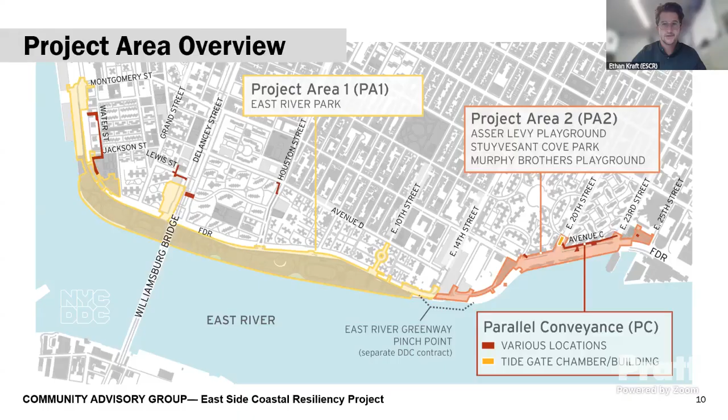A snapshot of the contracts, highlighting the major changes that have happened since our last meeting, our last virtual meeting in July. This reflects the new openings in East River Park, which include the amphitheater, the northern tennis courts, the Esplanade areas around those amenities, and then the Corlears Hook Park flagpole area and the Corlears Hook Bridge. The Pier 42 connection has also reopened, and then the 3 access points north at Houston Street are closed for construction in those areas of the park.

Up in Stuyvesant Cove Park, we are excited to see the opening of the East 23rd Street entrance with the completion of Solar One. I have some photos of that. And then Parallel Conveyance - these are the different locations that we have for that project.

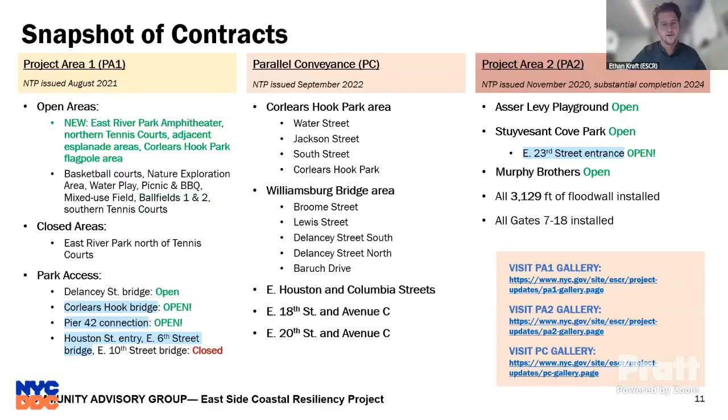In Project Area 2, the Solar One building, which was separate from ESCR, was recently completed. That allowed us to reopen the entrance at East 23rd Street, so you can now walk the full length of Stuyvesant Cove Park from the street side. We're very happy to see that open up. There are some punch list items still going on through Project Area 2, but most of the major work you would see is complete.

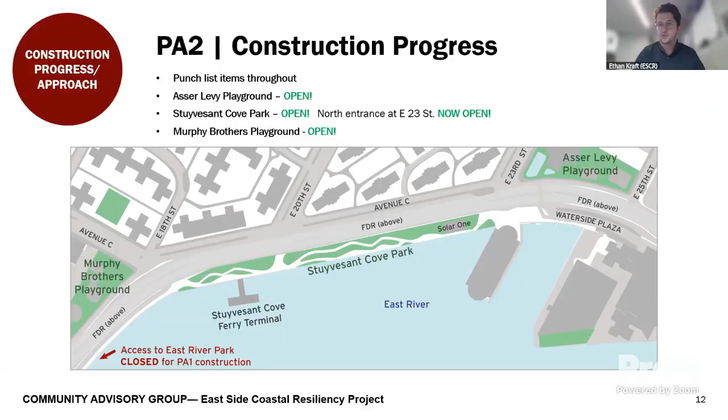Some photos of the Solar One building, which again was separate from ESCR. On the left is the building itself with the Esplanade on the right side of that photo, and then those 2 photos on the right side of your screen are the newly opened East 23rd Street entrance with a vehicle gate and bollards at the entrance to the park.

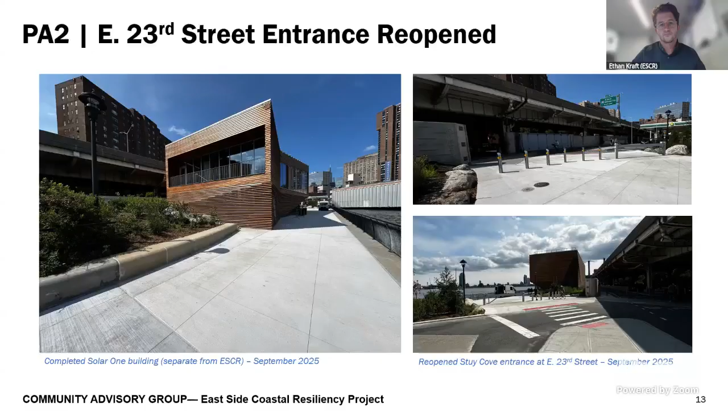Moving on to Project Area 1, we have construction activities all throughout the project. At the southernmost end, where you see the 1 on the map, we have flood wall and floodgate operations going on. The Montgomery Street parking lot is being restored, that's under the FDR. We have some photos of both of those operations in a couple of slides.

Moving further north, but remaining in the red area of this map, in that small sliver, there is a parks maintenance and operation building being constructed, as well as the tennis building. In areas 3 and 4, we have excavation, Esplanade reconstruction, more work on the East Houston Street retaining wall, and then clean fill installation for the portions of the park where construction is a little bit further along.

In the areas that have just closed, we get started on that deep sewer work, flood wall construction, and then excavation of those areas. In location 5, which is near Riis Houses, we have some night work for utilities. And then at the north end of the Riis complex, we are preparing for the flood wall construction that will cross the FDR and run along the property there at East 13th Street.

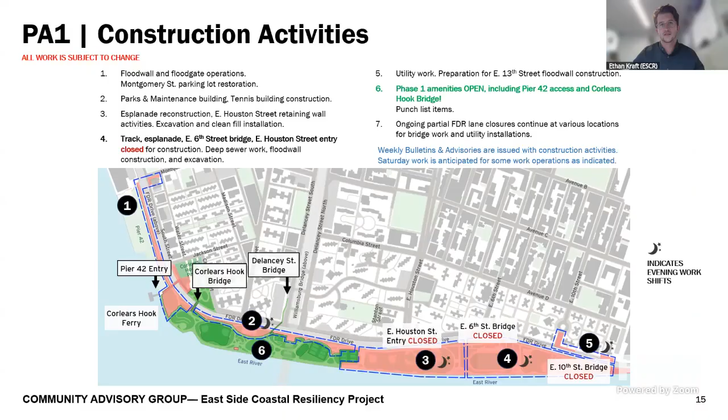Number 6 basically encompasses all of the newly opened areas, so East River Park as well as Corlears Hook Park. We have minor punch list items going on through there as that handover continues. And then along the FDR Drive, we have partial lane closures, usually at night, to accommodate bridge work or utility installations or anything that requires us to close a lane of traffic for safety.

We do have quite a bit of night work going on within the park itself. This has been going on this week, and it will keep going for another 2 or 3 weeks. There is a bit of night work up near Riis at East 10th Street, to accommodate utility work and median demolition, and that requires partial lane closures on the FDR Drive. So that's what this photo here is of.

You can see the trench that is right there at the FDR Drive service road near Riis. You're looking towards the East River and East River Park in this photo.

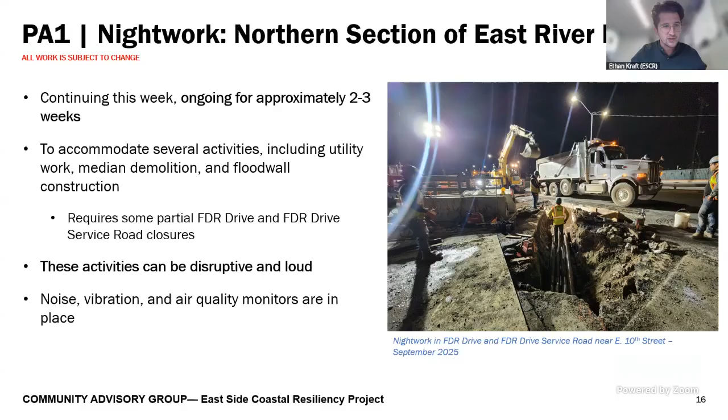These activities can be disruptive and loud. As always, if you hear something, say something. So if it's particularly disruptive, please try to take a video and contact our CCL so that we can get to the bottom of it and address it. We do not want to cause any more annoyance than we already are by working in the park at night. And then, as always, we have the noise, vibration, and air quality monitors in place around those activities.

Some construction photos. This is the deep sewer work that happens when we start work in a new area. You can see these trenches are pretty deep. On the right side is the steel formwork for some of the infrastructure that's related to the sewer.

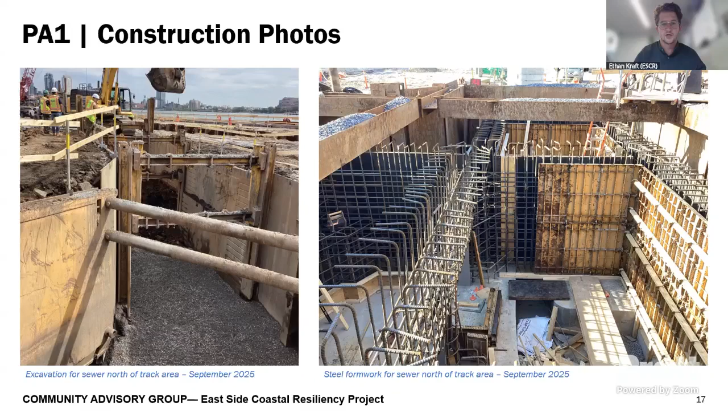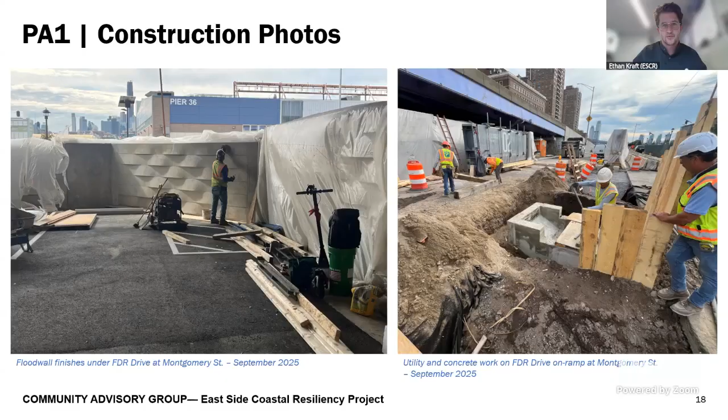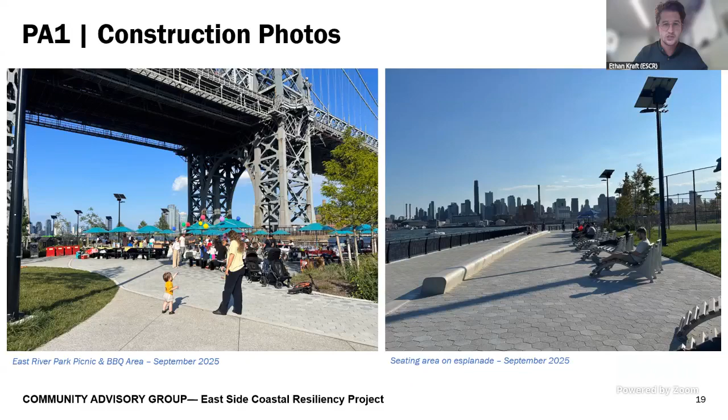The compost facility, located south of where the amphitheater will be, the project team will be presenting at Community Board 3 Parks Committee next month on October 6th. Also at that meeting, the 14th Street Connector, the overwater greenway near the Pinch Point and the Con Ed facility, the DDC team will present a high-level overview at CB3 Parks on October 16th, as well as the CB6 Land Use and Waterfront Committee on September 29th.

We've gotten a couple of questions about the parallel conveyance work near the Delancey Street Bridge, and we've confirmed that the bridge will not close for any of that work. Also, with the closure of the north end of the park and the Jewish holidays coming up, we wanted to improve our wayfinding signage from those newly closed areas, directing folks to park access at Delancey Street, Corlears Hook and Pier 42.

Again, if you see any opportunities for additional signage, please let us know so we can look into that.

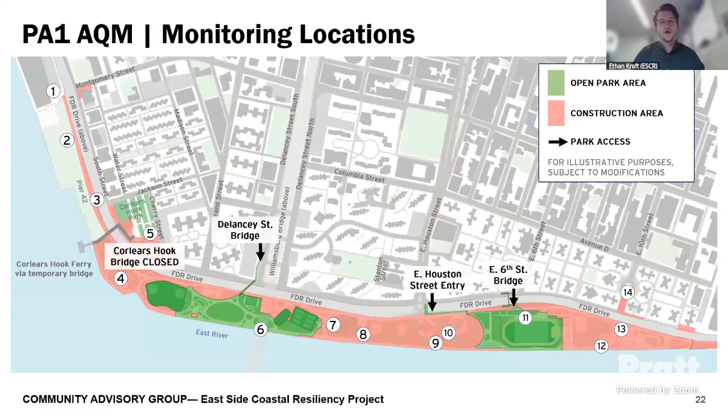For environmental monitoring in August, our machines were mostly in the same areas throughout the park. We had several alerts throughout the month. It was a dry month, and we are going to remind the contractor to apply more dust mitigation efforts, especially when it's so dry. Hopefully we can get some of these numbers down in future updates, but we'll reiterate to the contractor the importance of using water and other dust suppression techniques to keep dust to a minimum.

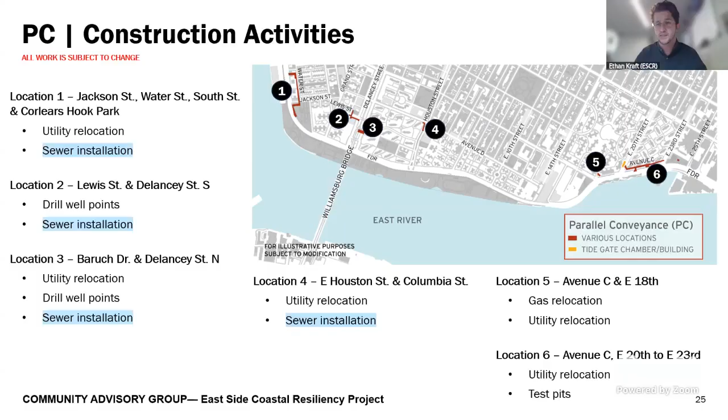In parallel conveyance, we have sewer installation underway or about to get underway in the 4 areas to the south. That's where most of the work is still concentrated. In the 2 areas up north, it's still mostly utility relocation and test pits.

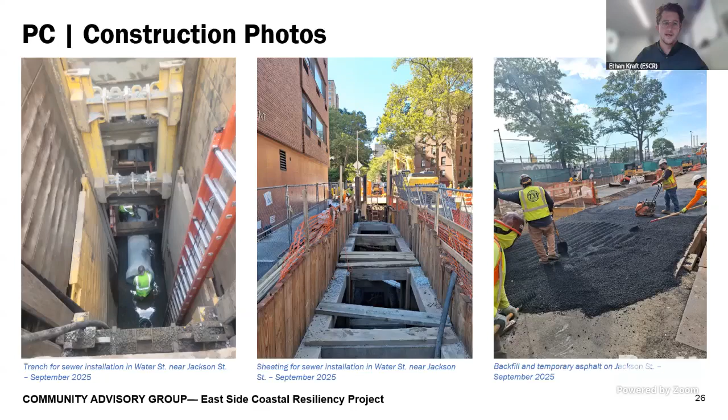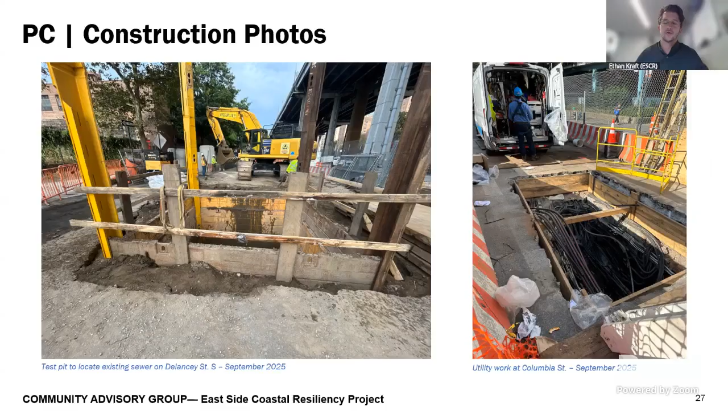Further north at Delancey Street South, this is a test pit to locate the existing sewer, some of the early stages of the deep sewer installation that will come under parallel conveyance. At Columbia Street, some of the utility work ongoing with Con Edison, while the deep sewer is also being installed in that area.

So that's our update. I'm happy to take any questions.